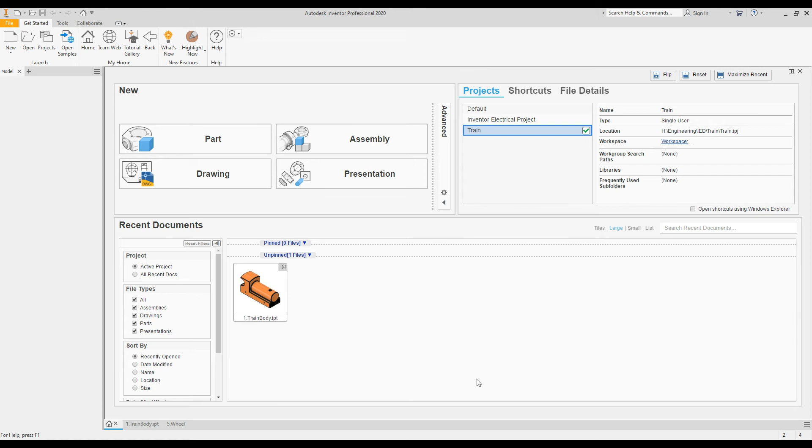All right, in this video we're going to work on a drawing sheet for the train. This one we're going to do stack, which has a section and a projected view, and then we're going to work on linkage arm, which has a break.

First, create a drawing sheet. Upper left, click the piece of paper, click English Engineering Sheet A, create, type in your name. It is the train, and this is stack and linkage arm. Say OK, say OK.

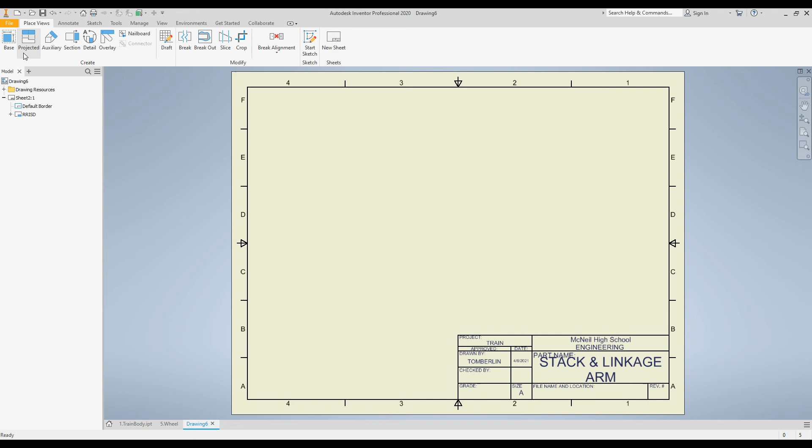We want to bring our stack in, so click Base, click the folder with the magnifying glass, go to Stack, Part 2, Open. We want to look it down from the top. We want it in 1 to 1. We want it in the upper left corner, and say OK.

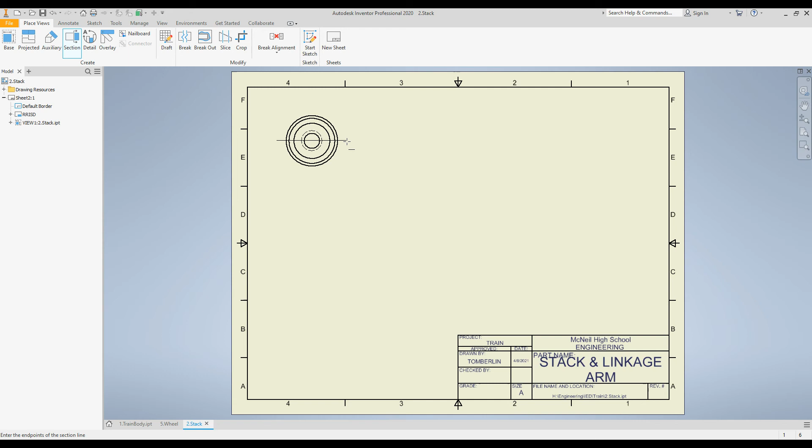Now we're going to do a section, so click Section in the upper left, click on the top, and then go on the far left where you get that green dot. Drag out about a quarter inch to the left, see that dotted line, click, drag straight through horizontally till it's about a quarter inch outside the right side, click, right click, say continue. You want your part going down so your arrows go up, drag down, click, you have your section view.

Next you want to project that section view, so click projected in the upper left, click on that view, drag through the corner till you get that view and out to the side, right click, then right click and say create. And then we're pretty much done on the picture.

It's up just a little higher, not real critical. We need to label that, but we have to label the linkage arm in a minute, so we're going to wait and we'll do the labeling all at the same time.

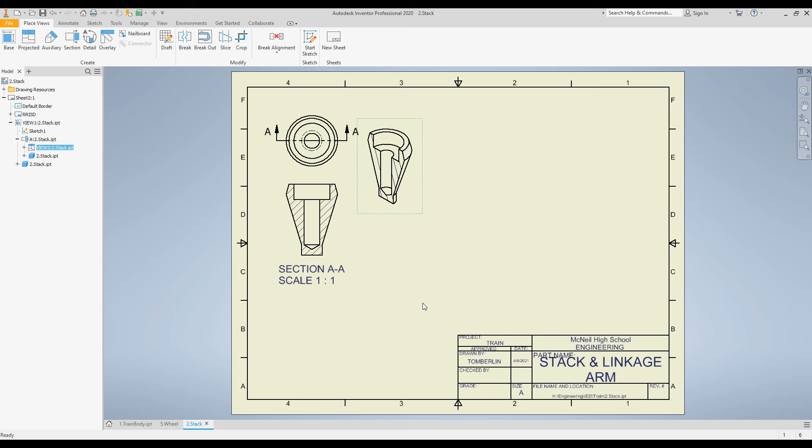So let's go place our linkage arm. Magnifying glass, part 7, say open. We'll put our linkage arm here. We're going to make this 1 to 1 again. We're going to do the top view, the isometric view, and the right side view. From there we're going to say OK.

We need to put a break in this because it's kind of long, so we want to shrink this down because nothing changes here in the middle. So we can go up here to the top, click break, click this part that we want to break. We're going to start the break over near the left side, then drag near to the right side, and you can see how it breaks it and cuts it down.

Now we can kind of move these parts around because we have more room. Things will fit better. Don't forget this part here. We should have it colored because it's the isometric 3-dimensional view.

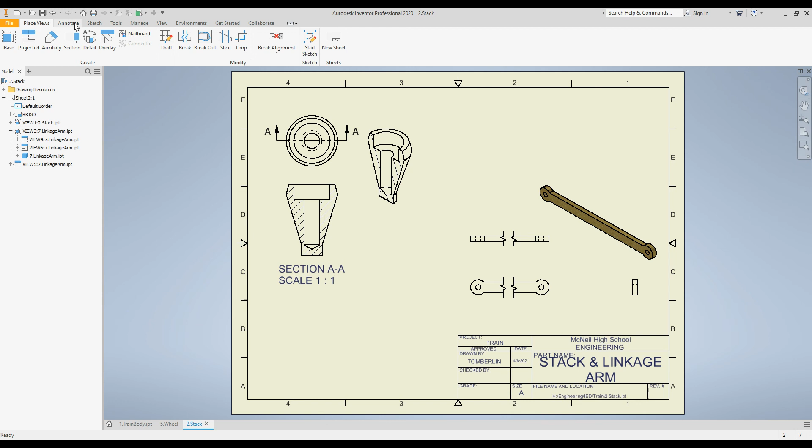And now we need to label. So we want to go to Annotate in the top left, click on Text, drag yourself out a text box. This is part 2, it's the stack. Say OK, and then do another text box for over here, because this is part 7, which is the linkage arm.

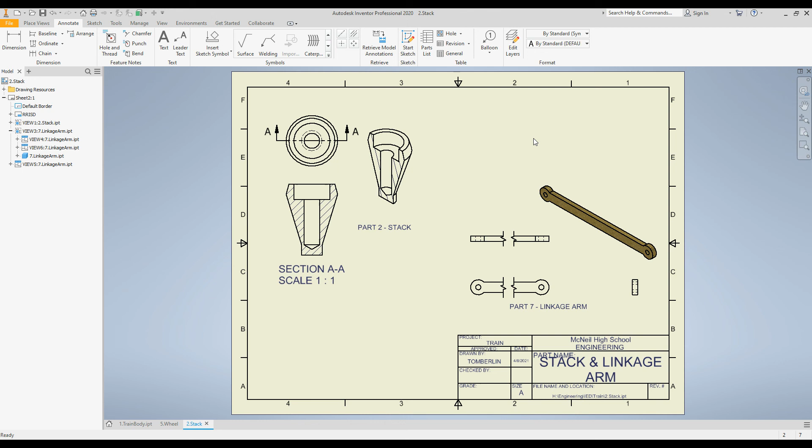And say OK. Now if you need to move any of those around, just hit the escape key, get out of the text tool, and then you can see I can move those around to wherever I want. It's not critical exactly where they are, as long as they're over there labeling some part. If it's easier, you can put it down here on the bottom if you think that looks better. It's not a big deal. Okay? And that is it for stack and linkage arm.